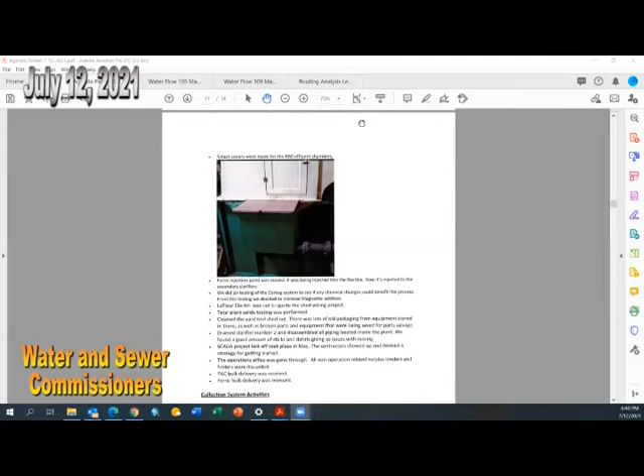Zach spent a couple days out at the plant in May, and me and him talked a lot about process, and we did some jar testing. And one of the things we discussed was moving the ferric injection point. We were injecting the ferric into the RAS line, which is the returned activated sludge. So what we were doing is we were injecting the ferric, and it was carrying it back to the head of the plant. So it was treating all of the influent before it got to any clarification.

And Zach seemed to think that if we injected it to the secondary clarifiers, it might work better at a lower dose. So we made that change, and the clarifiers really look a lot different than they did prior to that. They're nice and clear when it settles out now.

The other thing we noticed when we were doing the jar testing is we seem to be a little light on magnetite. And when I was reading through the process control management plan, it kind of points out that we were dosing a little light on the magnetite. And that's the ballast for the CoMag system. So basically what we were adding every day was 4 pounds. It was enough for the process to work, but we weren't adding any to the tank inventory. We were just replacing what we had lost.

So we upped that to 8 pounds a day per train. And now we're starting to build a ballast inventory. And hopefully in a couple of months, we'll be able to throttle it down to like 6 pounds and be in a good spot. LaFleur came out to give us a quote on the shed that you guys had approved. I believe you approved the wiring for it too already, but that happened in the beginning of May. So just wanted to note that on here.

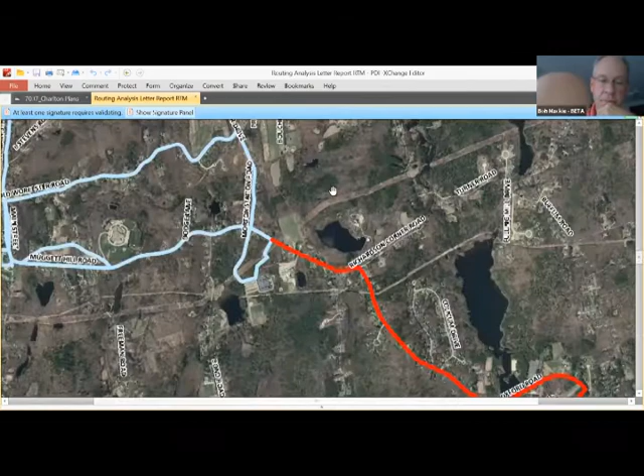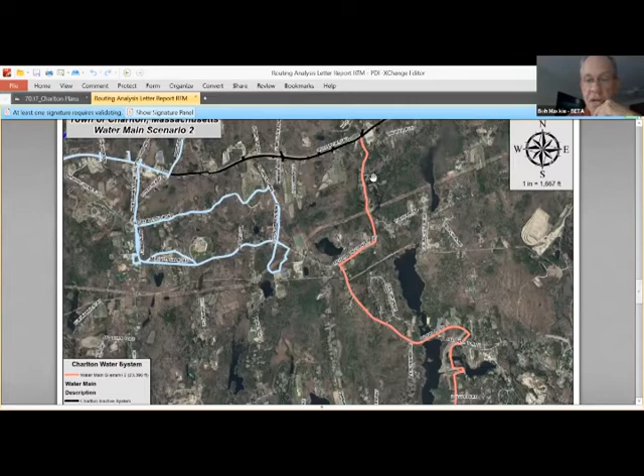The second option is basically the same as the first, with the exception of when we get to Richardson Corner Road, we would actually start to head east and then up onto Route 20. And we would connect into the existing pump station that's currently offline. This would also require reactivating some of this line on Route 20 that is inactive. But it would be nice to gain use of that infrastructure that's sitting there not being utilized.

Is that the black line, Bob? That's the black line, exactly. And that's because of the interbasin transfer issue that you had with Oxford, that all that pipe was installed, pump stations, a tank, and unfortunately it's empty.

This next option is basically the same as the first option, only rather than dealing with the spillway, because there is some possible issue with the spillway as far as where exactly the underground structures are, the drains, the footings for it. There's a couple of ways around it. We could try to dig around it or literally drill under it. But another option would be literally to just go around.

Adds pipe onto the job, but it would eliminate all the unknowns in here. And then from there, we show it tying into the existing system. And obviously, another spin on this option would be to head up to the pump station.

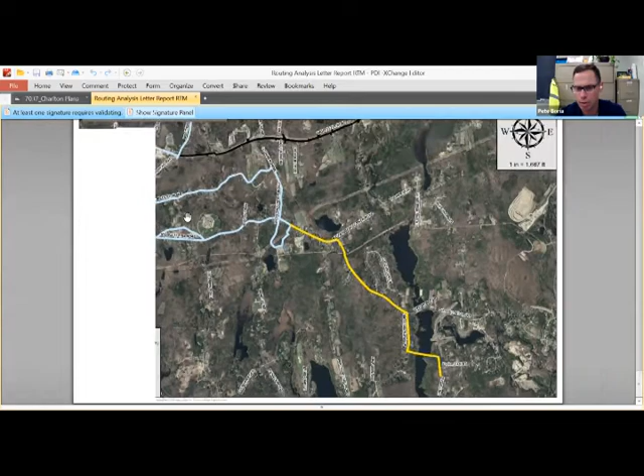Aren't those abandoned lines? They're currently not in use, but they're not abandoned. Okay. So I've been in contact with a representative from Buckeye Pipeline, and as I've said before, they haven't said no yet to allowing us access to the easement. But as Bob said, directional drilling with the unknowns doesn't seem to be really viable.

So my thought is if we were going to try and cross there, if we were to get access, would be to work with the Army Corps and just, you know, dig out a little bit near the shoreline to get our 4 foot of coverage, and then just somewhat lay the pipe on top of the lake floor and try and bed it after that, so that it's somewhat protected from boats and anchors and that type of thing.

Right. Actually, by DEP directional standards, you've got to be 5 feet down. We checked on that, even if it's on the bottom of the lake. Yeah, I mean, we might be able to get relief from that, but we'd have to meet with DEP to see if they would give us relief, which is possible. I mean, we're out in the middle of a reservoir.

So I guess, Mr. Chair, the main reason I wanted Beta to do this exercise is so that we could get some initial answers to what our train of thought was. And I think as you look at this chart with pricing, a lot of it is kind of estimated. It's planning level at this point, right?

But also as you look at the static head in feet and stuff like that, we could probably do a pump station on our property, but once we get up to the existing infrastructure, Bob, would we be able to carry enough pressure, you think, if our Route 20 tank was to come online, would we be able to get enough pressure at the pump station on Gale Road to get us all the way to that tank?

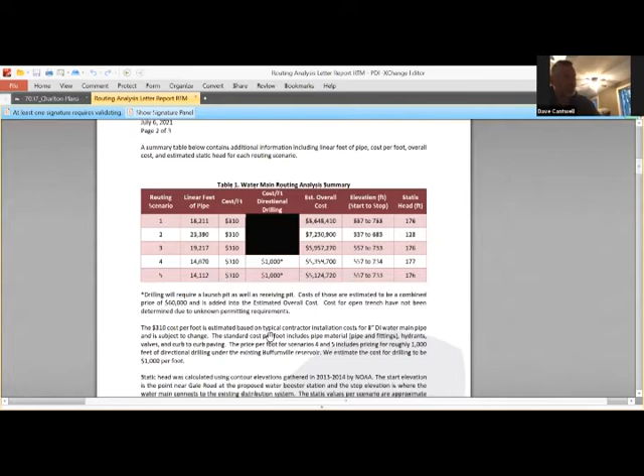Is there enough water on this one particular site to be able to pump it to that tank, fill that tank up and service our customers that we currently have? Yes. So if this tank has 225,000 gallons per day, the existing customers in that area is probably right around 100,000 gallons per day. Okay.

I mean, it's not the panacea where we'll be all set for the next 50 years. But it will get us started, and that will be our system that we would operate. And then Southbridge could still operate the portion that they're operating. We just have to kind of disconnect and have a couple redundant shutoffs so there's no cross connection. And then the nice thing about that is we can use Southbridge as our redundant water supply if there's an issue with our water system as well, because the lines are still there.

So, I mean, it'll take a little bit more coordination than that. I might be oversimplifying it a little bit, but it would be nice to keep that connection viable in case we have any problems in the future. But again, if this does happen, we're still going to be looking for more possible water for our own community. And with Southbridge operating in town, if we have to adjust which area of town gets water from where, we can do that by just moving some valves around and getting more water from Southbridge to one area and less from Buffumville in the future.

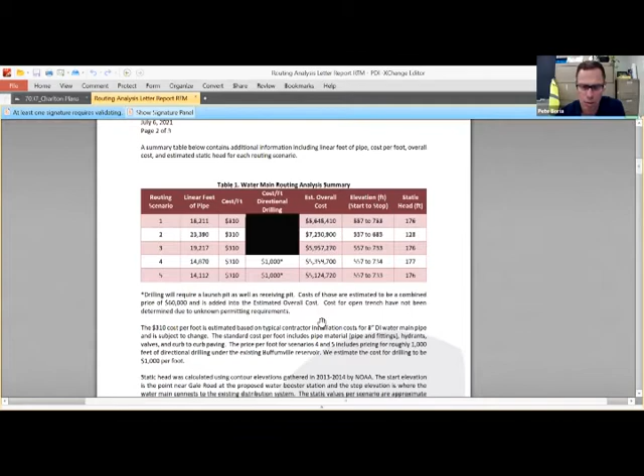So again, this is mostly presented for information, just to kind of complete this portion of the project, so we have some not hard numbers, but some ideas and some scenarios and what they look like, and just keep it there for informational purposes and go from there. If there's no other questions on that, the other reason Bob is here is to talk about the RFP for the access road.

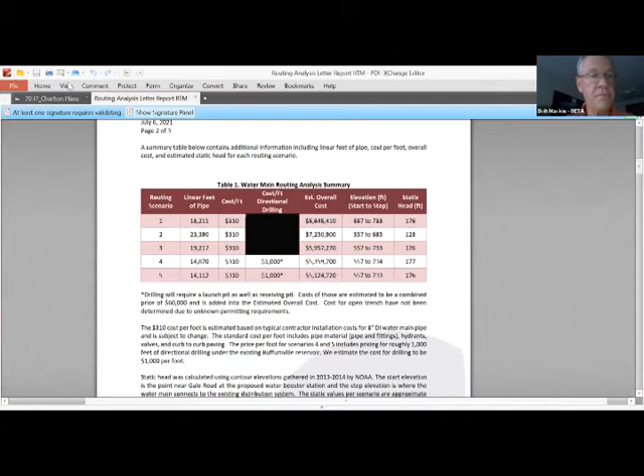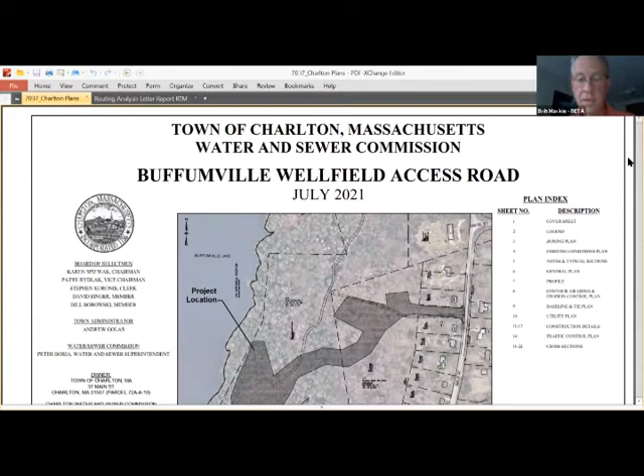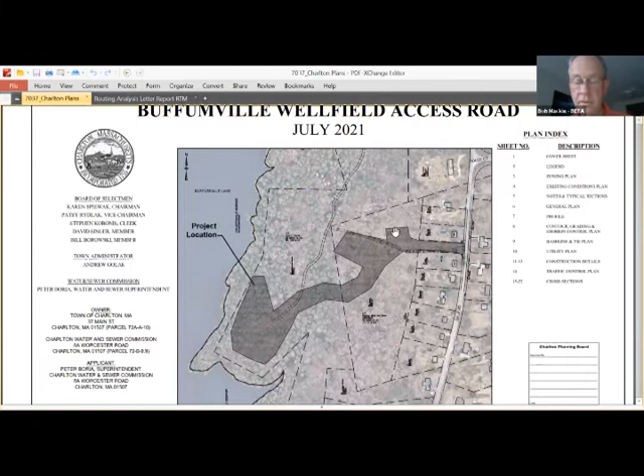Right. So let me see, can you see this now, the plans? Yes, it's switched. Okay. So we've completed the drawings, we've completed the specifications, so the contract documents are ready. Just to go over it quickly, this is the parcel of land we're speaking of. The wells are located down here. The pumping station would be located up in this area. This is the existing conditions, nothing fancy.

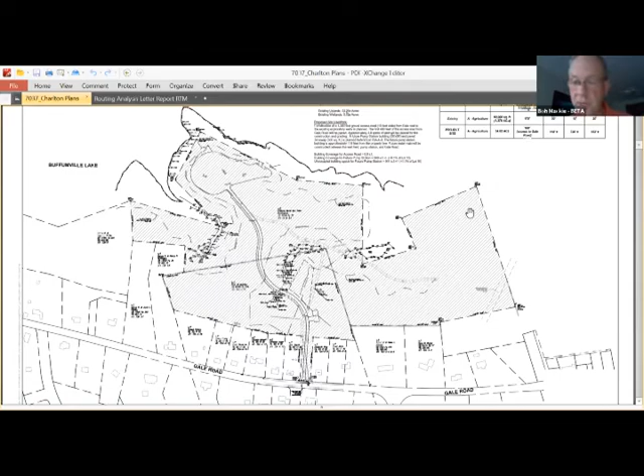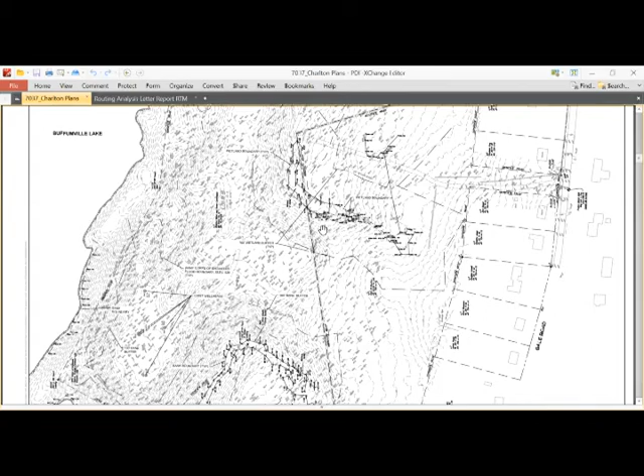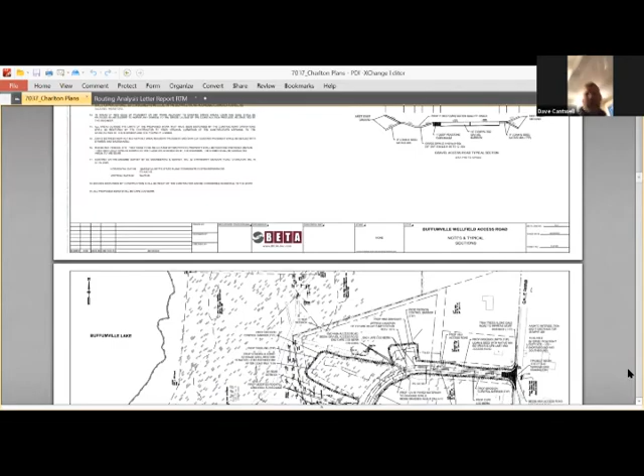These were the wetlands. So we do have an intermittent stream that we will be crossing. So there is a culvert contained in the project that we have to include, which would be part of the order of conditions. This is the roadway, talking a 16-foot wide roadway, Cape Cod berms on either side, paved. Bob, the whole road isn't paved, correct? Just the top portion, right, just about back to the pump station area where the pavement stops. From there down, we could put in gravel.

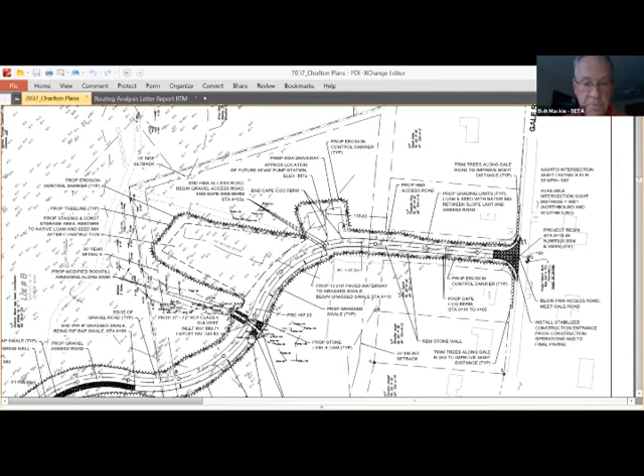So this is our transition out on Gale. We come in, pumping station would be planned for here, sweep down. This would be that culvert crossing that I spoke about. In case you're wondering about the shape, we're basically trying to follow a contour so that we could minimize cuts, although we are doing a substantial cut in an effort to keep the price of the project down. The material is going to be pretty good, nice gravel. So we're hoping there's a value to that that would reduce the overall cost.

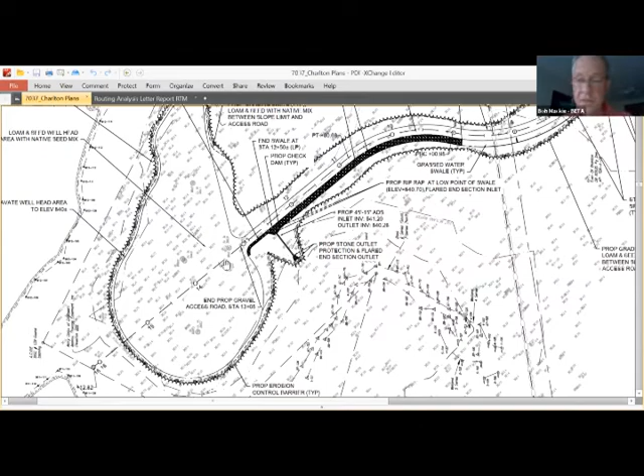Plus that cut can be used for the fill on the property, correct? That's right, for the cuts and fills, exactly. When we get down to the bottom here, we have a series of wells. I believe there's 5 wells. And then we've flattened out this area for vehicle access for installing and then maintaining the wells in the future. And you can see that we're not too far from the reservoir's edge itself.

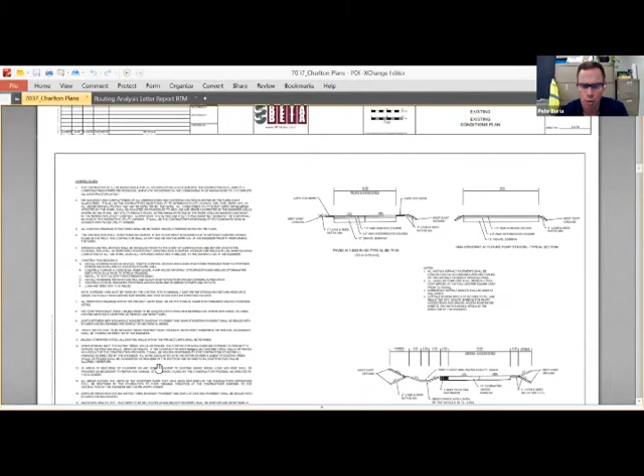Bob, excuse me, can you go back up to that other map? The one you were just on. Oh, this one, okay. Can you just identify where the cart path road is that we've currently used, just so that the commissioners can see it? Right in here, right? Yes, just that hash mark line right there.

So for those of you who have walked in, you can see how you walk in and then make that sharp left-hand turn. That current cart path is not viable to get the drilling equipment up there to drill the next stage of wells, which would probably turn into the actual production wells.

So we can't do, well, plus we want to take 20 feet off the top of that hill anyway, so you wouldn't want to pay for that additional depth of drilling. Right. And then just take all the material out from around.

So unfortunately, I guess the next step to go any further with this property would be to, again, we have this access road designed and permitted. It's approved from planning board and from conservation. So we're going to put it out to bid and see if there is any value in the excess material and what it might cost us to have this installed.

And historically, the DEP has been giving us an annual grant of approximately $200,000. If we get RFPs back and the price is a little more, we might be able to ask them for more, or we might be able to do it in a 2-phased approach where you do a portion of it one fiscal year and finish the rest the following fiscal year to get full funding to do that from Mass DEP and the grant that we've been getting historically. So

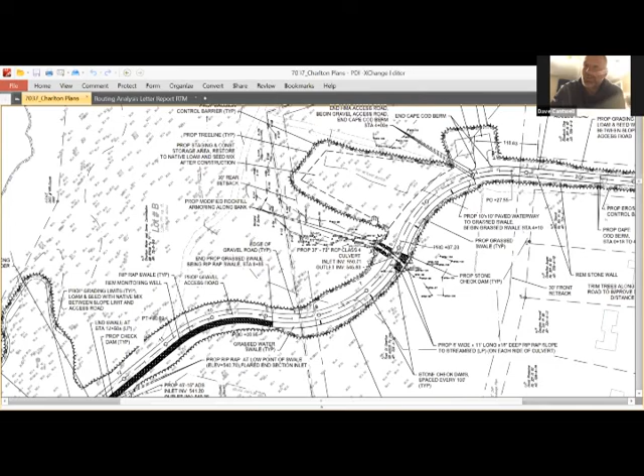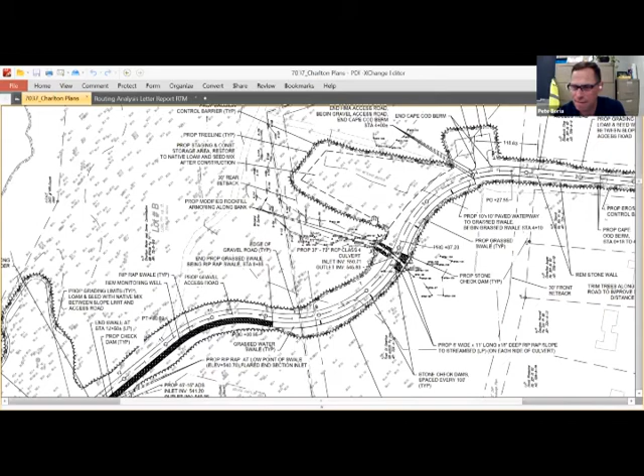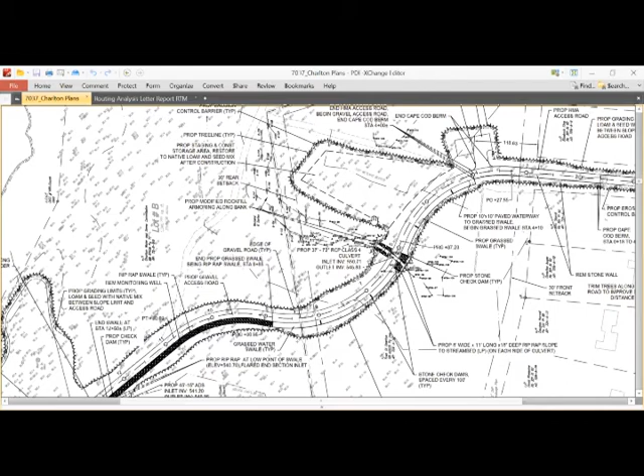Okay. Go ahead, Peter, for a roll call vote, unless there's more. Mr. Coleman? Aye. Mr. Redlack? Mr. Redlack? Mr. Gagner? Aye. Mr. Jennings? Aye. And Mr. Cantwell? Aye. All right. Thank you, gentlemen.

So Bob, you just want to follow up with me tomorrow and we'll see what we have to do to get that out to bid? Absolutely.